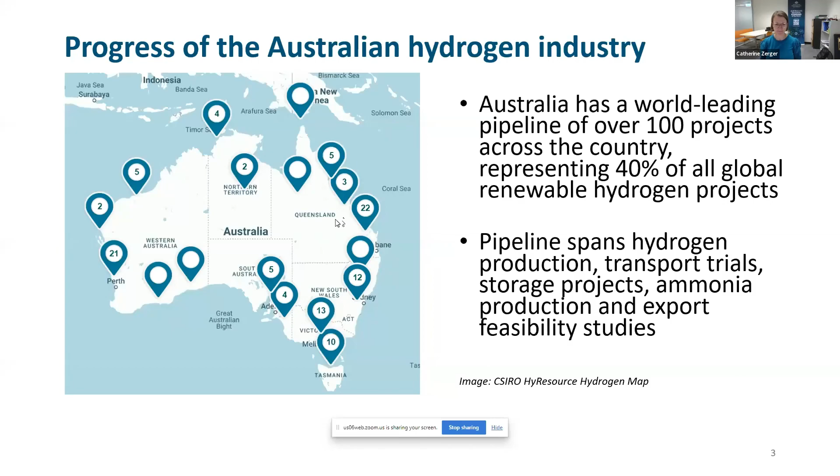To help build this new industry and reach our goal of becoming a global hydrogen leader, Australian governments at the local, state and federal level have been undertaking a range of activities to support early industry growth. Our collective governments have commenced initiatives including working internationally with like-minded countries, reviewing our existing legislation, regulations and standards to determine whether legal frameworks can support hydrogen safety and industry development, and developing a national hydrogen infrastructure assessment to look at hydrogen supply chain needs such as electricity and gas networks, water supply networks, refuelling stations, roads, rail and ports, and improving workforce skills and training.

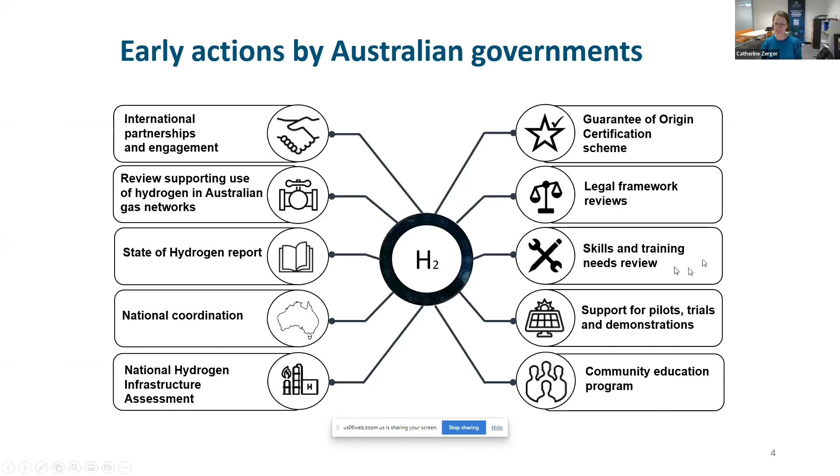The Australian government has now committed over $500 million to hydrogen hubs across Australia. This includes funding for projects in places including Gladstone, the Hunter Valley, the Pilbara, Port Bonython and Bell Bay. I'd also like to add that applications for a hydrogen hub in Townsville have now opened as well.

Hydrogen hubs are regions where various producers, users and potential exporters of hydrogen across the industrial, transport, export and energy markets are co-located. They'll give our hydrogen industry an early stage springboard to scale, which will help support other industrial sectors in the regions.

We're also developing a guarantee of origin scheme that will help unlock economic opportunities for the Australian hydrogen industry to meet growing demands, both domestic and international, for verified renewable energy and clean energy products. The Guarantee of Origin scheme will utilise internationally aligned methodologies to measure, track and verify a range of attributes, including greenhouse gas emissions for hydrogen and other renewable energy products across the supply chain.

The government consulted on a proposed scheme design in December last year, that I'm sure some of you may have contributed to. So for those, we thank you for your contribution to that consultation process.

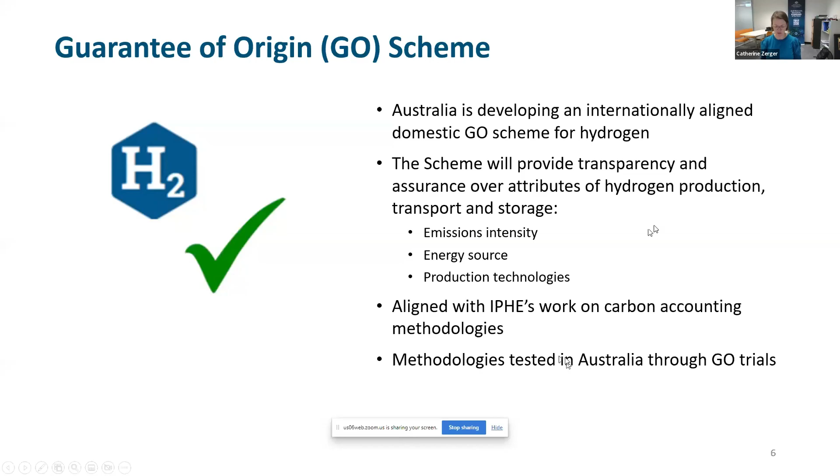The government's also investing $89.5 million to help the transport sector make the switch to hydrogen, including through hydrogen refuelling stations across Australia's busiest freight routes. By 2050, Australia's hydrogen industry could generate $50 billion in additional GDP and create over 16,000 jobs, as well as an additional 13,000 jobs from the construction of the renewable energy infrastructure to power the production of green hydrogen.

International collaboration can play a key role in realising our ambitions. Collaboration can help to accelerate technology development, to overcome technical and economic barriers faster, strengthen the linkages between industry and researchers, and build new supply chains and export markets.

Over the past 18 months, Australia has been developing a series of bilateral international partnerships seeking to advance cooperation on clean energy technology. We have partnerships with 8 countries that feature cooperation on clean hydrogen.

According to the IEA's Global Hydrogen Review, there was a significant increase in official national hydrogen demand targets in 2022, which saw a doubling of global demand for hydrogen over the last 12 months. For instance, the European Commission in 2022 doubled the previous EU renewable hydrogen target to 10 million tonnes of annual domestic production and an additional 10 million tonnes of annual hydrogen imports.

While Australia was only the 3rd country to deliver a national hydrogen strategy back in 2019, today there are 30 national strategies in place, with a further 7 in development. Our states and territories also have their own hydrogen strategy, and we know that many countries have also set hydrogen targets.

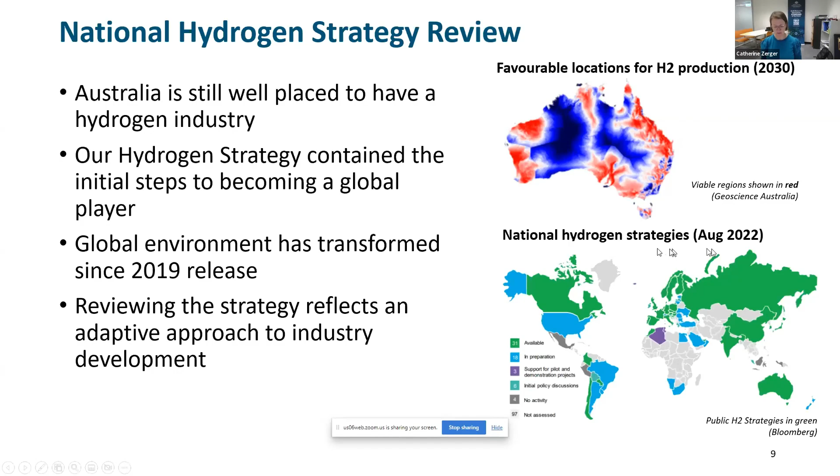So just last month, the Australian government, through energy and climate ministers, announced it would lead a review of Australia's 2019 National Hydrogen Strategy. This review will ensure the national strategy positions Australia on a path to be a global hydrogen leader by 2030 on both an export basis and for the decarbonisation of Australian industries.

The review of the strategy will take account of developments globally and in Australia since the original strategy was developed, including the impact of the Inflation Reduction Act in the United States and policies by other countries to support a hydrogen industry. We will soon be opening this review up for public consultation.

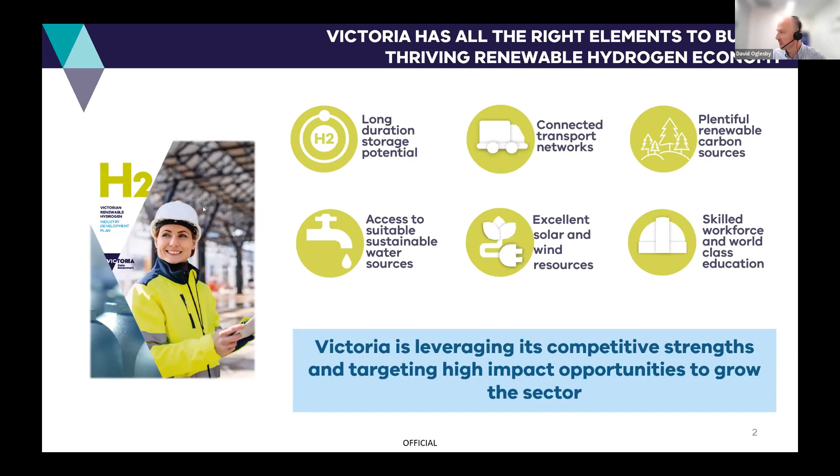Victoria has set strong targets to drive our energy transition. These include offshore wind, renewable energy, energy storage and emissions reduction targets. These targets form the pillars of Victorian energy policy, and although not explicitly focused on hydrogen, are actually helping establish our renewable hydrogen future. Renewable hydrogen has a critical role to help Victoria reach these targets.

To reach net zero emission targets by 2045, we must decarbonise all sectors, including the hard to abate ones. Areas like heavy transport require fast refuelling and longer travel distances than battery-operated vehicles can currently provide. We must decarbonise the freight and truck networks as part of the ambitions around meeting net zero emissions. Hydrogen will be essential to this.

Long duration storage will be required to meet our energy storage targets, and hydrogen can play an essential role in storing and generating electricity. Victoria has a large potential for underground hydrogen storage in depleted gas fields, which I'm going to go into a little bit more detail shortly.

Hydrogen can also offset investment in network augmentation and improve the commercial prospects of renewable projects, which will be critical as we progress towards 95% renewable energy. And finally, offshore wind has potential to bring massive amounts of electricity into the state, enabling large-scale renewable hydrogen production and potentially unlocking opportunities in areas such as green methanol as well as storage.

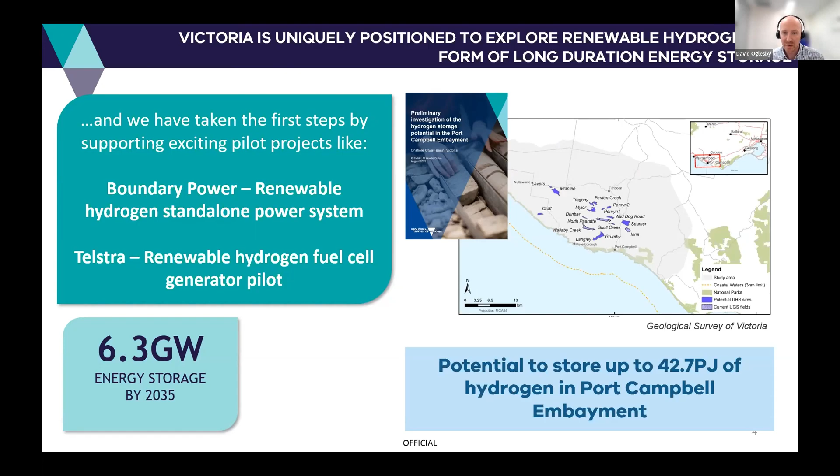The second area I want to touch on is around transport. Transport accounts for 25% of Victoria's greenhouse gas emissions. Renewable hydrogen can help decarbonise a large amount of this. Victoria is already leading in renewable hydrogen transport with at least 7 hydrogen refuelling stations built or in the pipeline.

We are partnering with industry and New South Wales to deliver an Australian-first hydrogen refuelling network on Australia's busiest freight corridor between Melbourne and Sydney, the Hume Hydrogen Highway. Victoria and New South Wales are both investing in supporting to build this project, which will deliver at least 4 refuelling stations between the cities and 25 hydrogen-powered heavy vehicles.

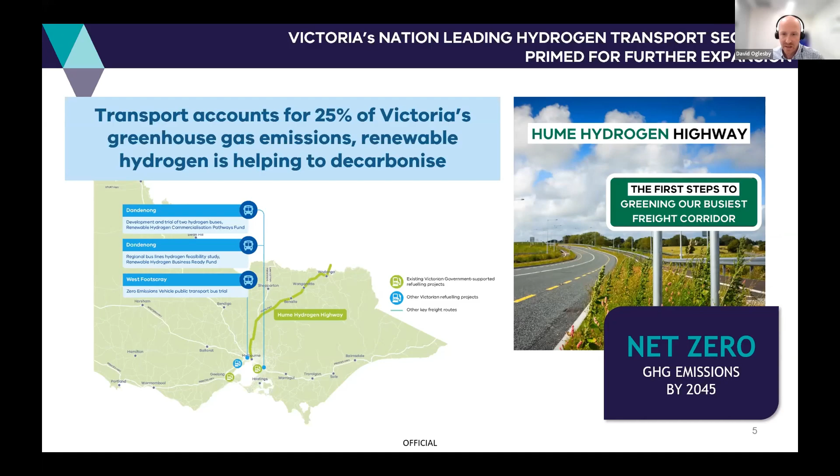The Victorian and New South Wales governments have also signed a MOU with Queensland. This MOU will form the basis of a collaboration on future developments of an interconnected East Coast renewable hydrogen refuelling network, focusing on key freight routes linking the states. In addition to the Hume Hydrogen Highway, Victoria is home to hydrogen vehicle manufacturers Toyota, Hyzon and H2X, and we are supporting a hydrogen bus trial in Footscray and hydrogen fuel cell research at HyCell.

The last area around our targets I want to highlight is offshore wind. The announced offshore wind zones for Victoria closely align with areas of strong potential for large-scale renewable hydrogen production, storage and use, making them exciting investment areas for all types of renewable energy. The majority of investment interest in Victoria's offshore wind to date has largely been linked with renewable hydrogen projects. We're seeing proponents coming with both hydrogen and offshore wind as a package.

Renewable hydrogen production can soak up curtailed renewable energy. This can improve the economics of both hydrogen and offshore wind projects. Large-scale renewable hydrogen production in these areas may also support the manufacture of green chemicals like green methanol and ammonia.

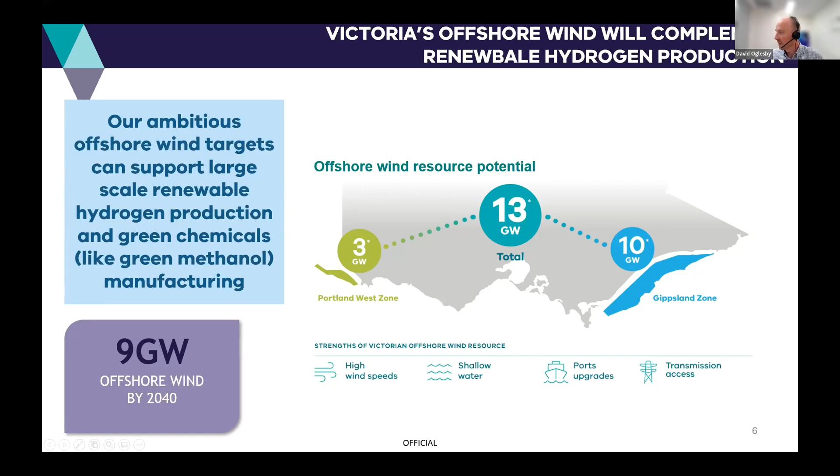Green methanol in particular is an exciting investment opportunity for Victoria, particularly for use as a shipping fuel. Victoria is well placed to capture a portion of that market as we already have the largest container and general cargo port in Australia, and I believe the fourth largest in the Southern Hemisphere. The large shipping volumes and our renewable hydrogen strengths make Victoria a promising location for future bunkering of renewable shipping fuels.

Finally, I just want to cover some of the activities underway in Victoria, which is really building out a renewable hydrogen ecosystem. Victoria has made several groundbreaking investments in renewable hydrogen, including the Renewable Hydrogen Commercialisation Pathway Fund, Renewable Hydrogen Business Ready Fund, and a number of projects under the Energy Innovation Fund. These cover a range of sectors from industrial switching and transport through to electricity generation and gas blending.

These initiatives support the industry to build this emerging sector from the ground up, driving hydrogen production and creating the demand and innovation needed to build scale and impact. These investments and our ambitious targets are creating one of Australia's strongest domestic hydrogen markets, ready for further investment.

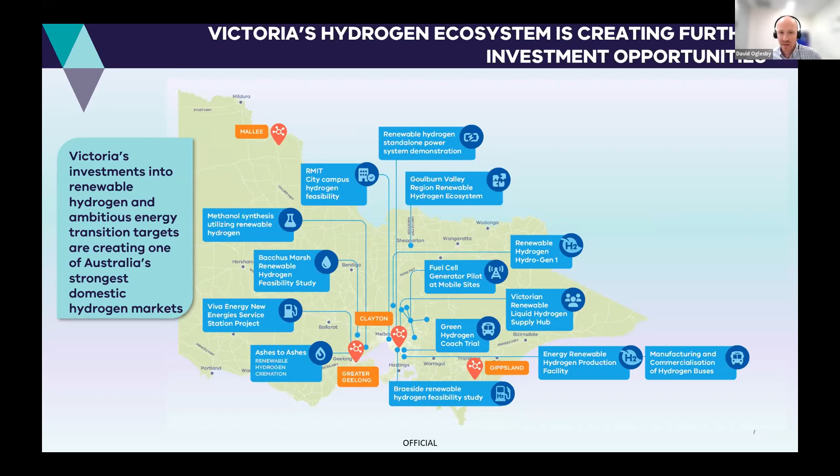Thank you, David, for sharing a very solid presentation. During your speech, we've also received so many questions from our audience. The first question is: what is the most exciting emerging renewable hydrogen opportunity in Victoria currently, and how does the state plan on capitalizing on it?

It's an excellent question. There are a number of different areas, and we've taken a broader approach around how you build out a domestic market, so we've got a number of areas where we're seeing high potential. But a couple are worth highlighting that we're seeing emerge quite quickly, and it gives us a unique difference from other jurisdictions. The energy storage, hydrogen storage aspect is something we're really keen to explore in detail. We see that as a bit of a game changer in terms of the role of hydrogen in Victoria, and more broadly within the NEM.

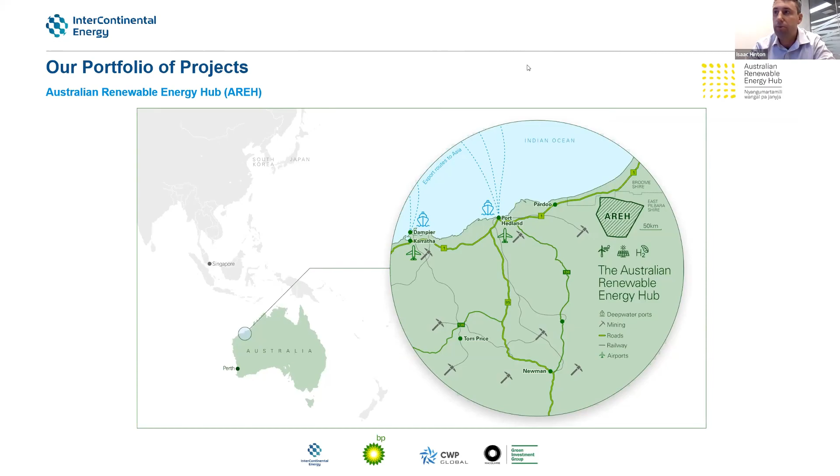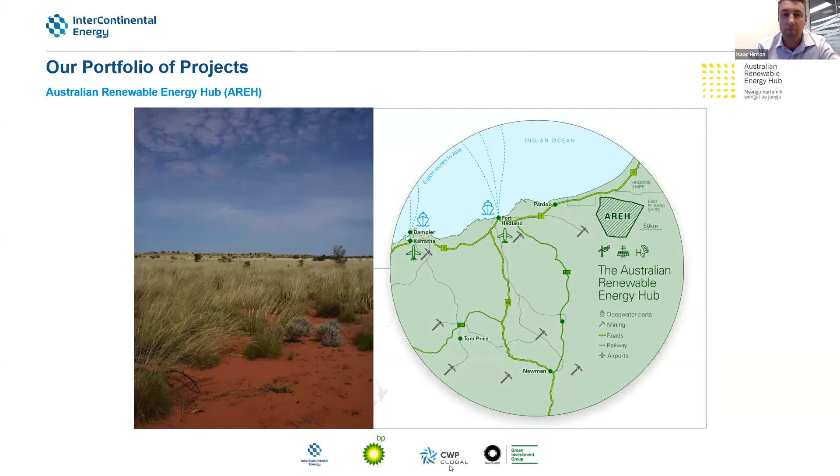At full scale, AREH could produce approximately 1.6 million tonnes of green hydrogen per annum. But also, and importantly, the project could be a major supplier of electricity, hydrogen, and hydrogen products to the Pilbara area, which I'm sure many of you know is a major mining hub of Australia. We think this project has huge potential to support the decarbonisation efforts of the mining industry. With the partnership of the Nyangumarta people, the traditional owners of this land, it's an exciting project for the community, region, and the country.

Next is the Western Green Energy Hub. We believe this is one of the largest proposed green hydrogen projects currently in the world.

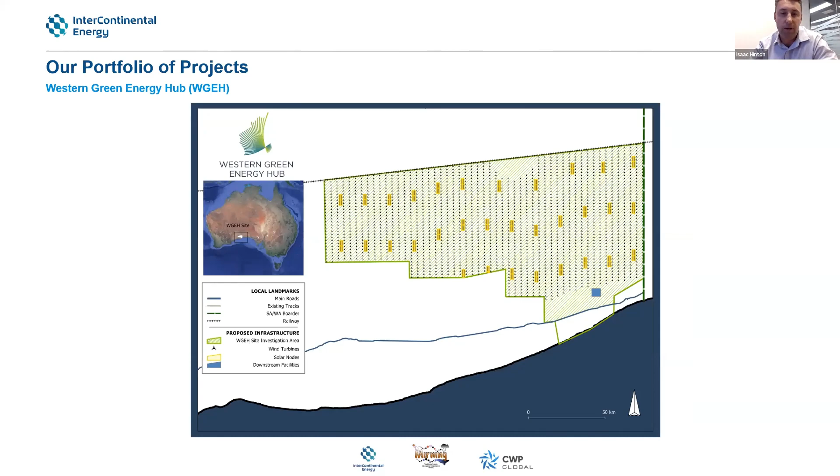The vast coastal desert plains located in the far southeast of Western Australia's Goldfields region, this hub will harness the untapped renewable energy of the wind and the sun. Now, the project is in partnership with the Mirning traditional owners in more ways than one. The Mirning have a 10% ownership in this project, a director on the board, of which I'm chair at the moment, and involved in all the decisions of the project and its development. To our knowledge, First Nations ownership of a major project such as this is the first of its kind in Australia, and we're incredibly excited to be on this journey together with the Mirning. Now, to be built in phases also, the project has a capacity of up to 50 gigawatts of upstream wind and solar. That equates to approximately 3.5 million tonnes per year of green hydrogen that will be produced.

Our next project is the Green Energy Oman, or GEO. This project was initiated in 2018 in partnership with OQ, the Sultanate of Oman's global integrated energy company, and Enertech, a Kuwaiti state-owned company focused on clean energy investment and development. On the 10th of January 2023, we announced that Shell has joined GEO as the operating partner to develop this 25 gigawatt project. The consortium is working towards delivering more than 1.8 million tonnes per annum of green hydrogen to accelerate the energy transition both in Oman and internationally.

So on to success factors. There are a number of success factors we believe as ICE, InterContinental Energy, as an organisation, which we think is critical to producing green hydrogen at scale.

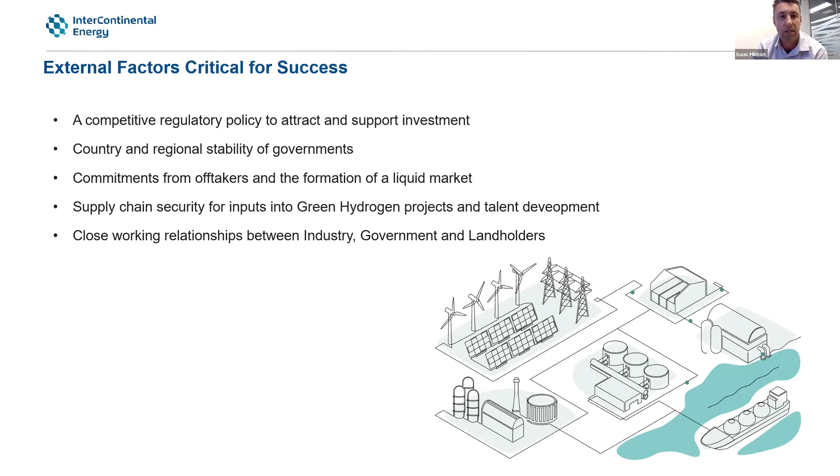So with this quick overview, I'd like to thank you for your attention and hope I've given you a snapshot about InterContinental Energy's critical success factors. If you have any questions we don't have time for today, please don't hesitate to email info@intercontinentalenergy.com, and I'll make sure we have the right person to follow up with you.

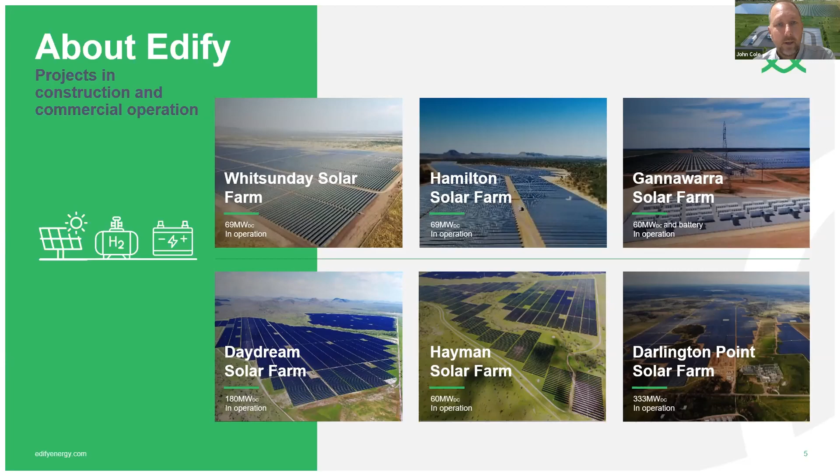As I say, they're solar and battery storage, and that's just shy of $2 billion that we've raised and put to work, which is just the beginning for this business. A recent project we've got underway, in the final stages of construction and commissioning, is a very large battery with Tesla in southwest New South Wales. The offtake agreements there are with Shell Energy and Energy Australia. This had government backing from the New South Wales government and also ARENA to support the smart power electronic application and the way we're using the inverters, harnessing the inverter capacity to keep the network stable in that region.

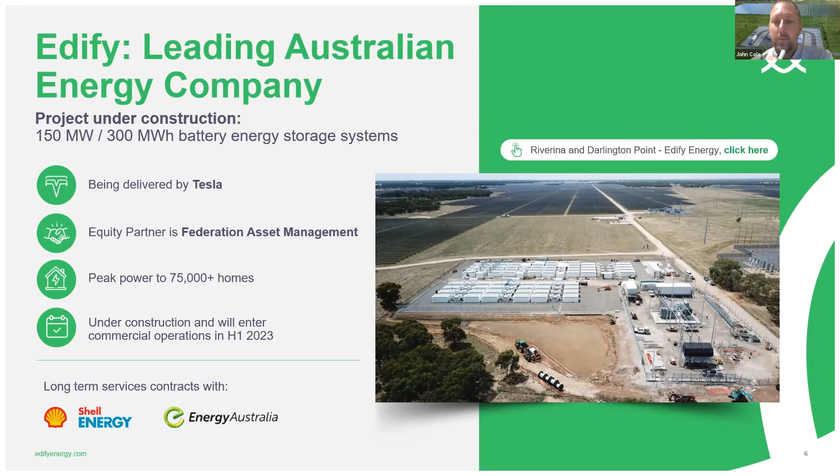This slide shows what Edify Energy has done. We started in solar. I thought it was going to be easy like it was in Europe, and the assets were relatively passive, but in this country they're very much hands-on assets and need to be managed. So you understand more about the market, you're in deeper relationships with regulators and governments, because we develop and also own and manage. Community relationships are very important to us, and being a very good long-term neighbour in our communities is fundamental.

And as we've gone through that energy development, we looked at the development of those projects. We looked at every site we had to determine which were the sites best for green hydrogen production and export. And the lead of that, at least currently, is the project I'll talk about now.

So we have a project. It's in one of the two renewable hub areas, hydrogen hubs determined by the Queensland government recently. One is in Townsville, the other is in Gladstone. I'll show you the site specific - it's 105 hectares of land, an artist's impression of a hydrogen facility and behind-the-meter solar behind me.

We've taken a real developer's approach to this project. So we secured the land, we obtained the development permission for a gigawatt stage project that was technology agnostic and could be built out in many stages to meet the needs of the market as it evolved.

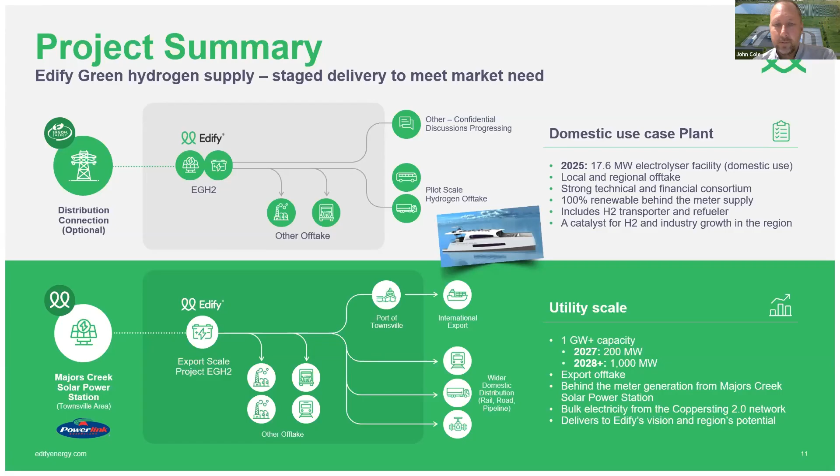There's just a little bit here about what we've been doing with Siemens Energy, our technology provider, and some of the detailed work as we've nailed down the engineering, looking to value engineer a number of aspects, or value out the aspects that are more draining from a CapEx perspective, and improve the documentation as we move towards financial close.

We were also successful recently - the largest project, the only project in Queensland, the largest grant recipient under the joint Australian and German government hydrogen technology incubation funding round called HyGATE. Our partner there was Siemens Energy, as the technology partner and also investor into the project.

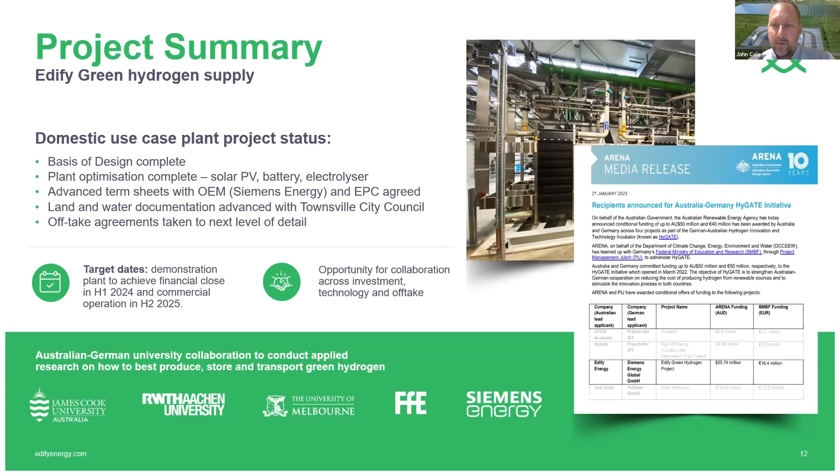And we have a research angle to that as well, looking between two Australian universities, James Cook University and Melbourne University, and like counterparts in Germany, Aachen and FFE, looking at the best ways to produce, store and transport green hydrogen. And that research has a very, very practical application.

So the HyGATE success was really just a validation of where our project is by way of readiness and the features that we thought made it a very attractive project, both from a demonstration plant and also for its export potential. We're also backed in by ARENA and the German equivalent, the PTJ, which was very, very encouraging for us.

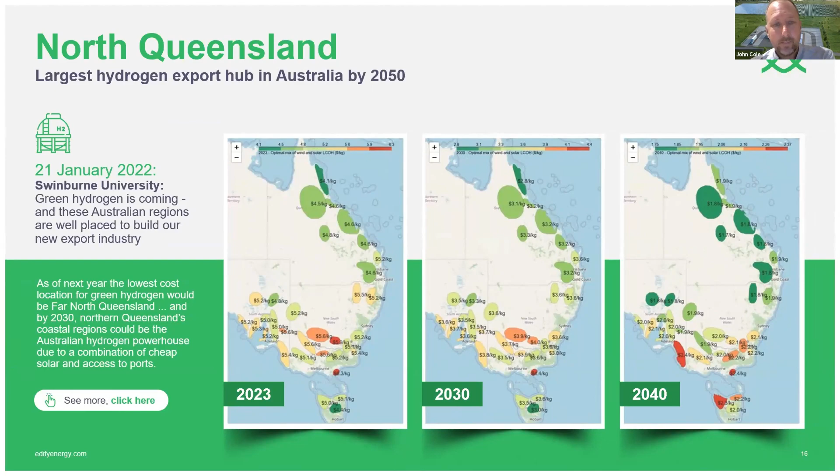That view, I think around early 2022, was echoed when Swinburne University came out with an LCOH study that arrives at a very similar outcome. There are links in the slides that you can click through and read at your leisure.

Around two years ago, the former CEO of one of the Queensland-owned utilities, CleanCo, Maia Schweizer, at a conference I was presenting at with her, showed a slide that really surprised me - she says it's her view, not government policy - of a 20 gigawatt green export hub in Townsville. The Queensland government has recently commissioned a report from Advisian, which basically goes on to validate the attractive features of our project, though they didn't have the resources to produce reports of the calibre I've just referenced.

Townsville has a very large capital base, population base, the largest city in North Queensland. There's a hydrogen hub funding round currently from the federal government, $70 million. Renewable resources and water I've already talked about. The community is definitely backing this in and sees the opportunity, so there's good federal, state, local government support as well as community support.

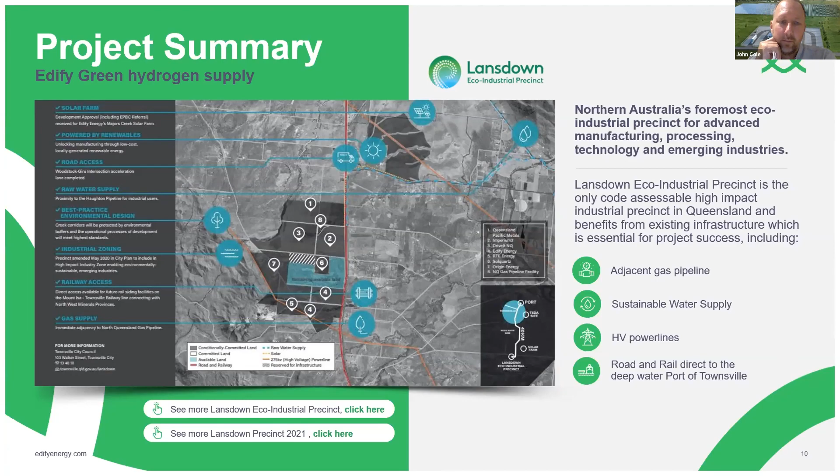At our site, the Lansdowne Eco-Industrial Precinct is the only code-assessable high impact zone in Queensland. The Queensland government has also taken over development responsibility, appointing a Coordinator General to make sure all the infrastructure needed is coordinated in a strategic, state-based manner, so that all the bulk renewables come in to connect into these orange power lines just south of the site, with the site being a significant priority development in North Queensland.

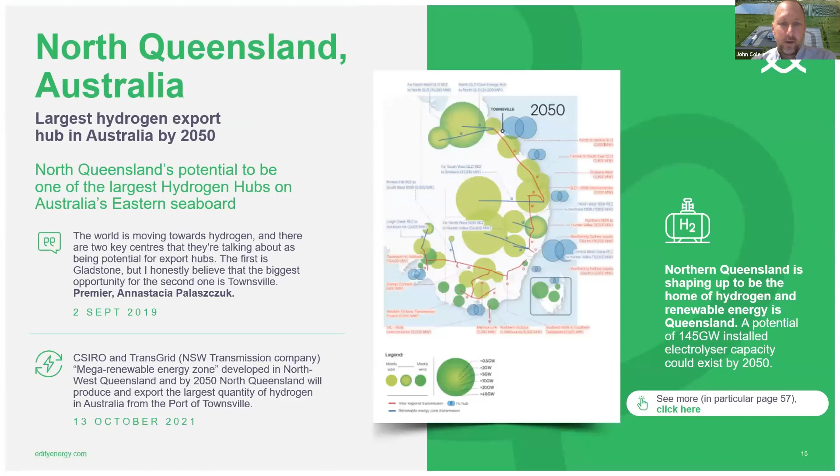So those things bode very well for both us and for creating the ecosystem and hub you need across the different jurisdictions. I think North Queensland has a lot going for it. There's been a local North Queensland hydrogen consortium established, and anybody interested in hydrogen in the region should definitely reach out to the consortium there - we were one of the founding members along with others.

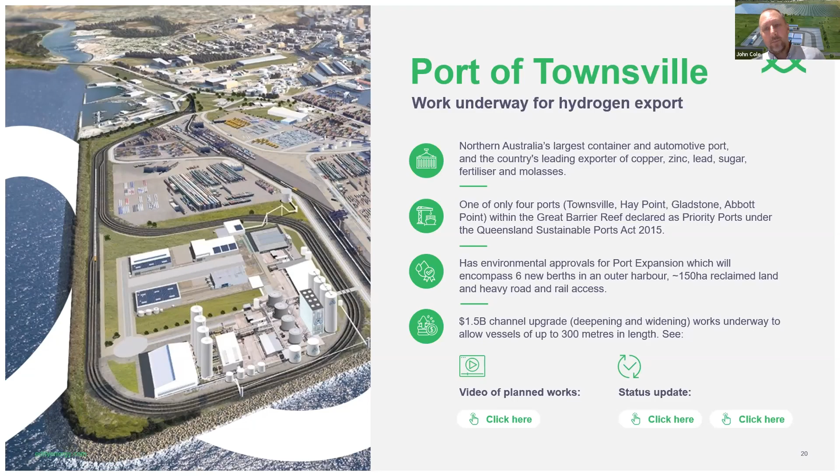And the real jewel in the crown, as I call it, is the Port of Townsville. This slide's cut off some of the imagery, but this is an artist's impression. This channel - it's the only port on the Great Barrier Reef with environmental authorisations to expand - as it deepens and widens its channels to take larger vessels, that spoil is being used to reclaim land on which will sit the infrastructure necessary for green hydrogen and associated product export. Of the half a dozen new berths, three have been earmarked for green hydrogen related products. So that's excellent.

And then on the technology side, we've gone blue chip. We really like Siemens Energy - their depth and the number of places their electrolyzers are deployed around the planet is very impressive and bankable. That's what we need from our perspective.

And then we've got a partnership with Enscope, who have been working with Siemens for quite a while, to deliver the project basically on a turnkey basis. It's a joint venture, but a turnkey solution from the project perspective, which is what investors are looking for, and has risk - particularly in early stage or formative projects like this - allocated to the right parties to take them.

And the last slide is just a bit of a summary, to be read later, of the things I've just talked through. So I think we've got a very, very exciting project in a very good region of Australia, with endless opportunity, and we look forward to playing our part in delivering and executing it. So thank you very much.

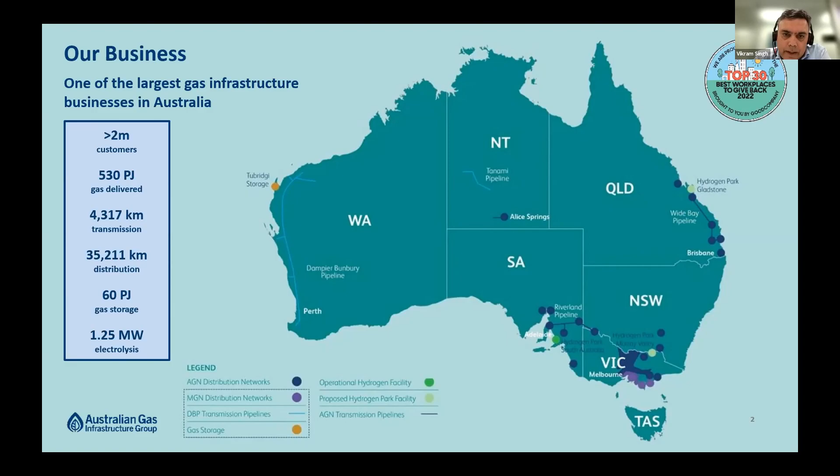Just for a very brief background, AGIG is essentially a gas infrastructure company. On the East Coast, we have several gas distribution businesses, and in total about 2.2 million customers are connected to our gas distribution businesses. We operate in Victoria, South Australia, regional New South Wales, Brisbane and regional Queensland, and in Western Australia we have a very significant gas transmission business.

As we look towards 2030 and beyond, we know the world is on a trajectory to decarbonize energy use, and with that in mind AGIG has embarked on its own decarbonization journey. What we're targeting is to inject renewable gases into our network up to 10, maybe 20% by 2030, and lay the foundations for full decarbonization of gas supply in the distribution network between 2040 and 2050. So that's our aim, and we have several projects.

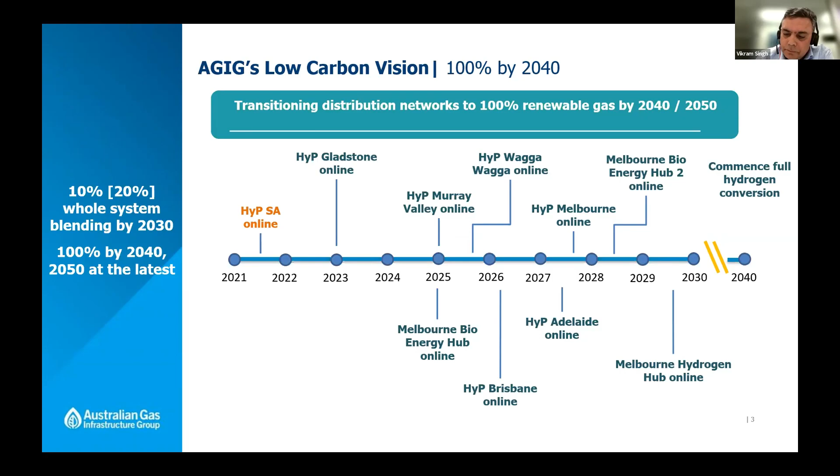Some we have developed, some are in very advanced feasibility stage, both renewable hydrogen and biomethane. So that's what we refer to when we say renewable gases. Just another view of where our projects are being developed and implemented, pretty much everywhere where our assets are, from Queensland, Victoria, regional New South Wales, and South Australia.

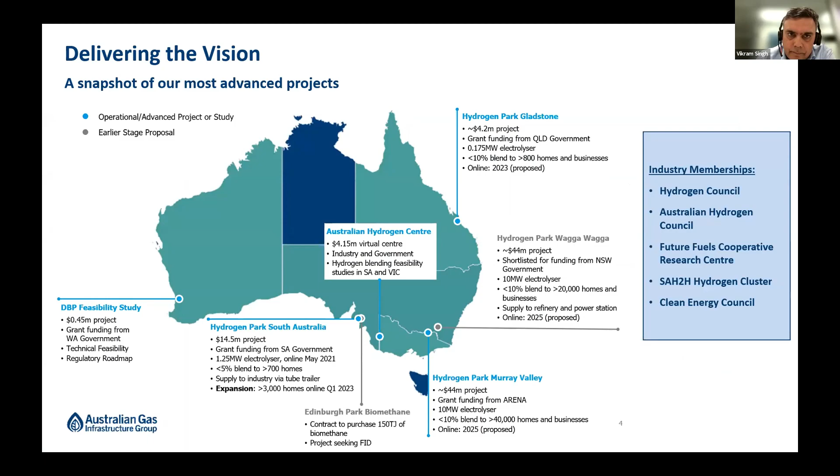We also have a very good partnership with BOC, and we supply them with renewable hydrogen, which they then supply to their industrial customers. So the facility is in operation, it's not an artist's impression, it's been working quite well for two years, and now we are expanding our footprint.

We're going to 3,000 homes this month, and after that we go to 10% blending into 4,000 homes, and further supply renewable hydrogen to BOC for mobility and other uses. So it's been a really important project, and we've learned a lot of lessons delivering a small project, but still the largest electrolyzer, and that has really given us the confidence to develop much larger projects.

To achieve 10% renewable hydrogen, we're looking at a gigawatt of electrolysis to achieve our target, and we are well and truly on track to deliver that project, to deliver on that ambition.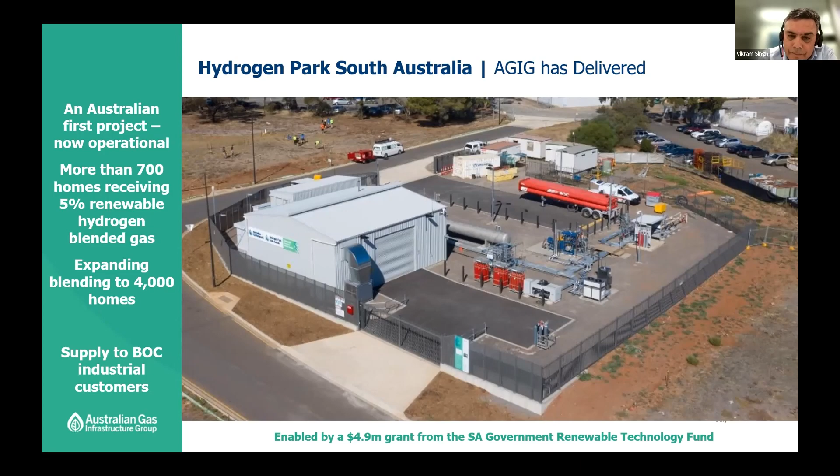I'll talk to you about our second project, Hydrogen Park Murray Valley, a 10 megawatt project which we are developing in Wodonga. It's co-located with the Wodonga wastewater treatment plant, so there are lots of synergies with the wastewater, oxygen, and biomethane as well. It's going to do 10% blending for 40,000 customers in the regional towns of Wodonga and Albury, so it's a very significant project for us. It demonstrates gas blending, or hydrogen blending, at scale.

I'm glad to say that hopefully this month or early next month we can announce our FID, and then we expect the project to reach commercial operations in Q1 2025. Once this is in operation, this will be the largest electrolyzer. Right now it's 1.25 megawatts; hopefully in 2025 it's 10 megawatts.

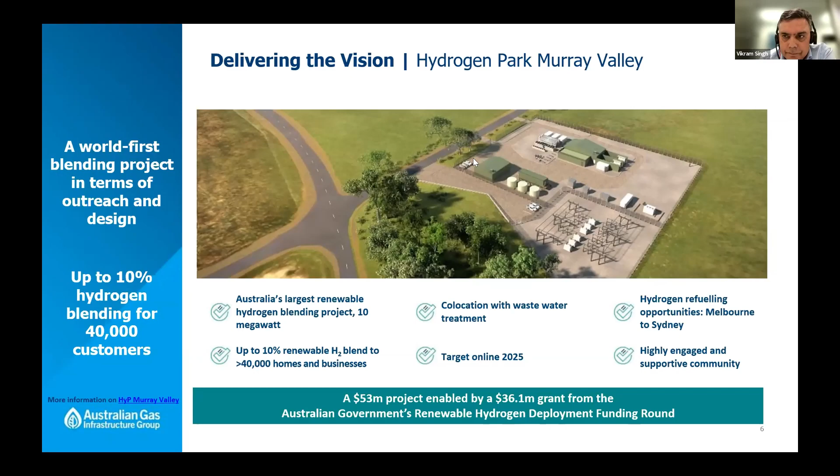This is the project site, so it's a really good site. And we're really excited to have Northeast Water very engaged and very supportive of our project.

One of the things about the successful deployment of these projects is really getting the support of the community and our key stakeholders. That's been a really important lesson when we were delivering HyP SA. We did extensive stakeholder and community engagement, and the community were really supportive, and that's the reason we were able to deliver our project in Adelaide. As we extend that project from 700 homes to 4,000 plus homes, the community is really excited to get renewable gas delivered to them.

We took a similar approach in Wodonga Albury, where we did extensive community and stakeholder engagement, not only with the broader residents of Albury Wodonga, but also with key stakeholders including technical regulators, the council, governments, the landowners, community groups, Vic Roads, Northeast Water, Ausnet as the local distribution company, and all the industrial customers in Albury Wodonga, making sure their industrial processes were not impacted by what we were doing. We also had several focus groups with community and business groups, so a fairly significant community and stakeholder engagement program.

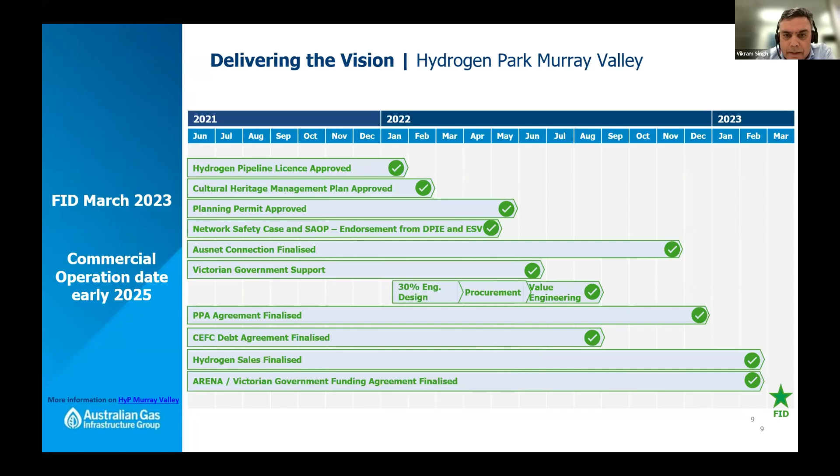But that's not where we are stopping. We're developing a similar project in Wagga Wagga, regional New South Wales, and that's under discussion and development with various governments and funding agencies.

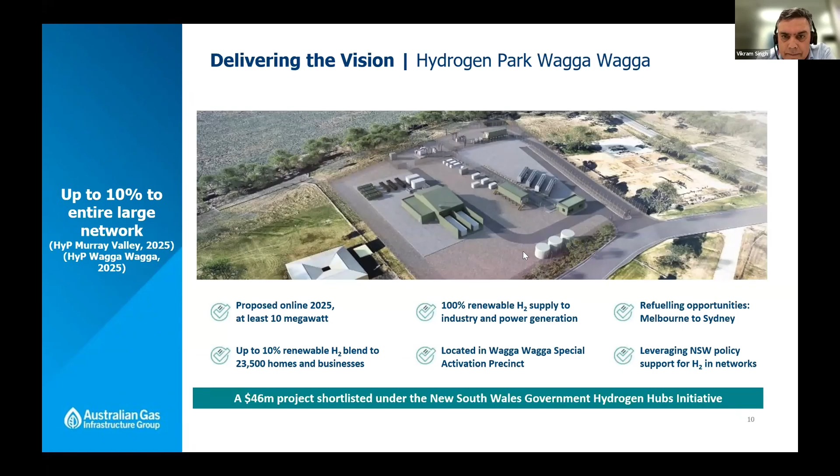Also, when we are developing our projects, we have a view to becoming a large supplier of renewable hydrogen, not only to the domestic market in terms of gas networks, but also to mobility as well. So we are positioning ourselves to be a supplier to these emerging markets. And of course, if you look at where Wodonga is located, it's right along the Hume Highway, very well placed to supply renewable hydrogen to the Hume Highway corridor once that gets underway.

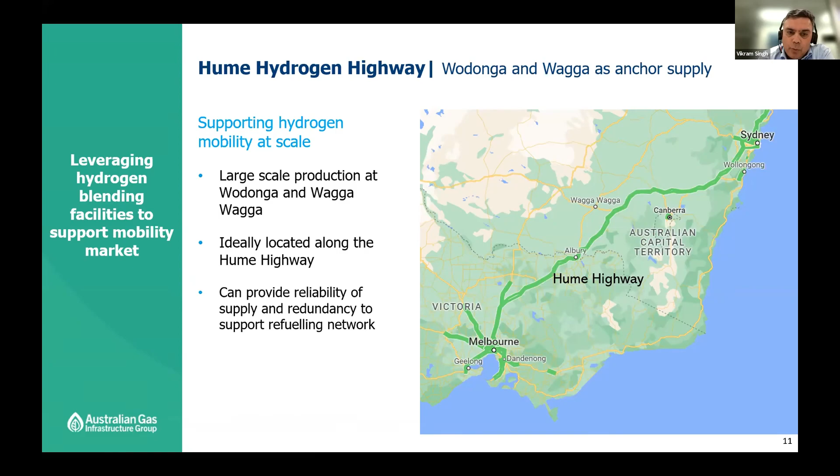So in summary, I think our success factor has been really, we have a market and the market is gas blending. And what that does is enable us to get the investment going, build scale and capability. We've demonstrated that can be done successfully with our Hydrogen Park Adelaide project, and also Wodonga and Wagga and other projects. We hope to have about 1 gigawatt of electrolysis supplying the domestic market by 2030. That gives us scale and capability, leveraging off a market that already exists and which we understand.

And the other thing is that once we have that anchor investment bedded down, that gives us the opportunity to supply the mobility sector, which has been slow to emerge in Australia, but finally it's getting some momentum. And of course, the existing industrial demand. So we are setting ourselves up to be a large supplier for the domestic market, including mobility as it ramps up. And through this, it's an efficient way to decarbonize our gas networks, providing customers choice, and also supplying renewable hydrogen to the mobility sector.

So in summary, the key factors for success as far as AGIG is concerned is the access to the market being gas blending. It doesn't require negotiations with export customers. It doesn't have the challenges of a gigawatt type scale project. We can start small, build and grow in increments which make sense to us - 1 megawatt, 10 megawatt, 40 megawatts, 100 megawatts. And we can do that on the back of blending into our gas distribution networks and set ourselves up for supplying hydrogen mobility and other industrial demand.

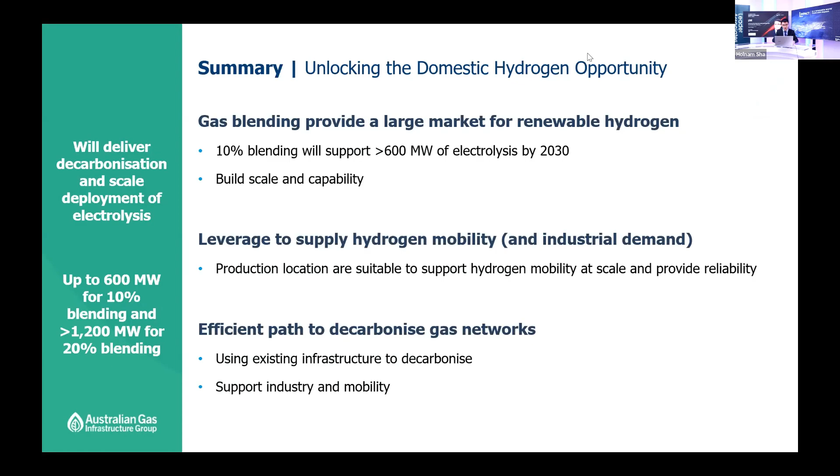He wants to know what are the challenges you are facing with the embrittlement of pipeline and how you are planning to mitigate this now and in the future.

Yes, very good question. It's a question we often get asked. An interesting fact is that our distribution networks are all plastic networks. There are some cast iron mains, but we're in the process of replacing them, not because of hydrogen, but just because of safety and leakage concerns. So the hydrogen network, the distribution network, is all plastic, and in fact it can take about 100% hydrogen.

When it comes to the high pressure network, which operates at around 30 bar, even those pipes can take about 10-20% hydrogen. So that's not a problem at all. The larger transmission systems, the larger transmission pipes which run at very high pressure, 80 bar and above, there is still research which needs to happen to see how they will play a role in hydrogen blending and how that evolves over time. But when it comes to the medium pressure and low pressure networks, they're all fine with hydrogen blending, and in fact 100% hydrogen. Our network is 100% hydrogen ready.

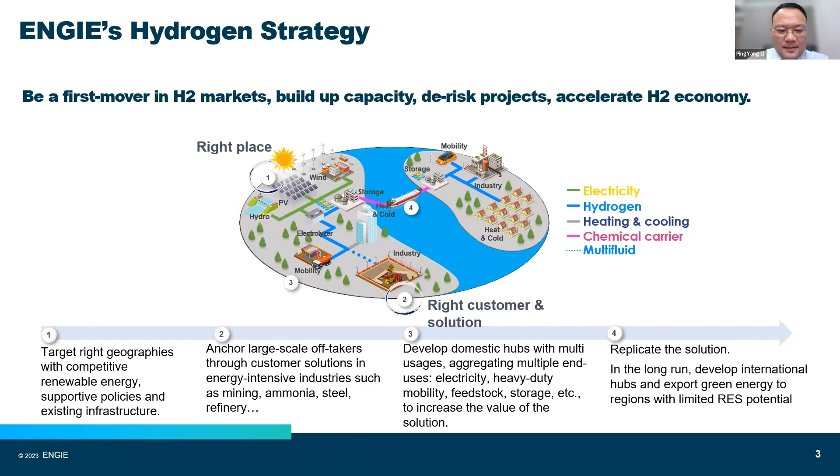ENGIE has a big ambition in hydrogen development. The approach ENGIE takes is to position as a developer, owner, and operator of the entire hydrogen value chain. We often do it with partnerships. Here we illustrate some of the prioritized targets by 2030. For example, we would like to achieve 4 gigawatts of electrolysis for hydrogen production, and we are interested to build 700 kilometers of infrastructure for hydrogen pipelines and more than 100 refuelling stations.

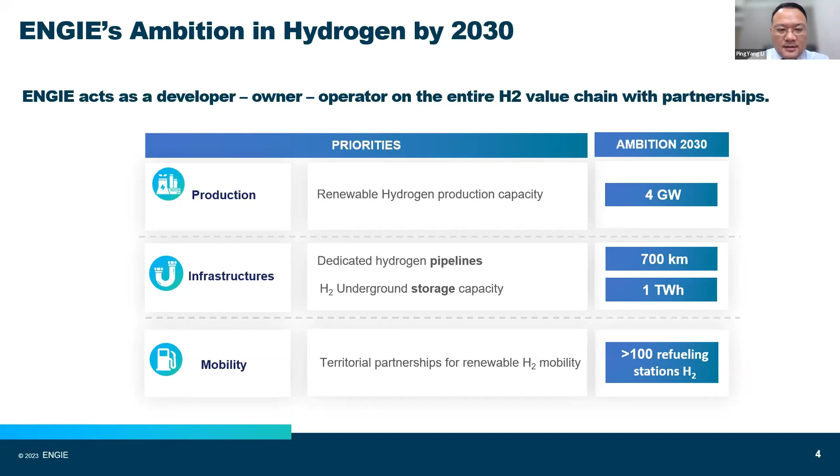ENGIE sees hydrogen as a global business, and we operate worldwide. We have more than 30 projects in the advanced development stage. Here is a selection of a dozen of them to illustrate which type of projects we are working on. You can see it's quite diversified in customers, partners, and industries we are targeting. The projects include mobility, heavy-duty mobility such as trains, maritime, mining like mining trucks, hydrogen for biorefinery, green ammonia, chemical feedstock to produce methanol and other renewable fuels, and also liquid hydrogen.

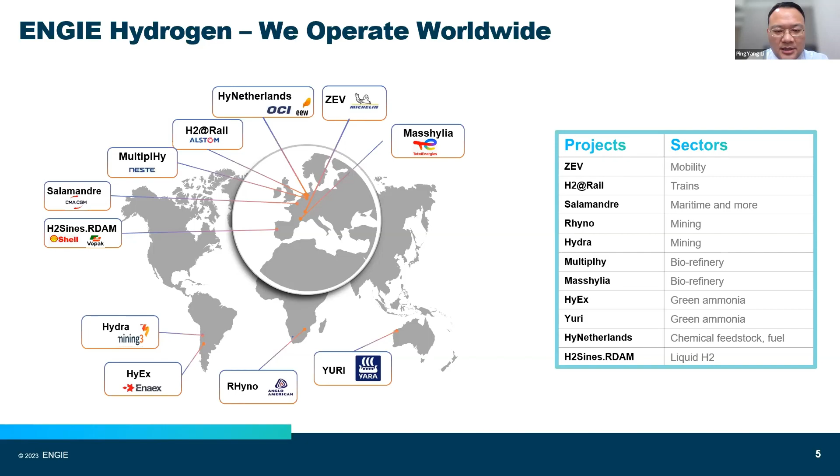Today, the main discussion here is the YURI project in Western Australia in the Pilbara region. ENGIE and Yara have set up this collaboration surrounding Yara's ammonia plant in the Pilbara area. If you look at this solar resources map, Pilbara is one of the best solar irradiation regions all over the world. And there is a port, the Dampier port, one of the few ammonia ports that can export ammonia to serve Australia and also Asia and beyond. Today, Yara operates 0.8 million tons of ammonia plant already, and they export the ammonia over Asia.

The YURI project is a multiple stage roadmap, and the roadmap is to establish a new industry, including decarbonized ammonia production, at the same time harvest the rich renewable resources in Western Australia to make hydrogen and ammonia, and use those chemicals as a feedstock and also as a fuel, to serve the domestic market and export to Asia and beyond.

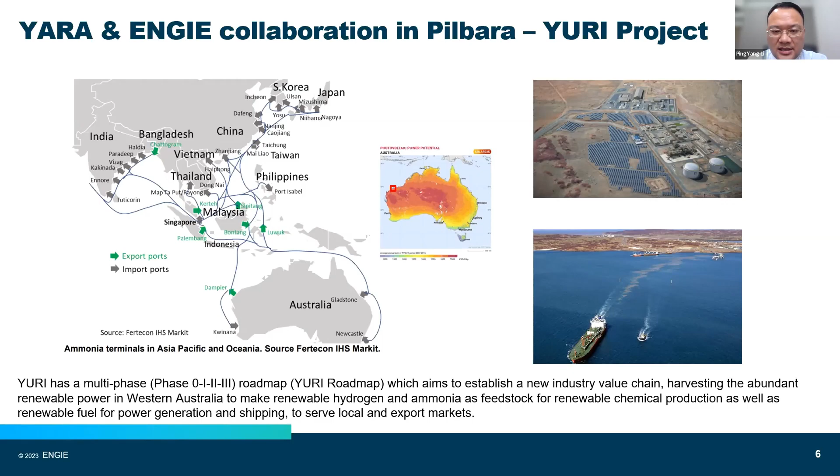The roadmap has phase 0, 1, 2, 3. The first 2 steps are to decarbonize a part of the existing ammonia plant, and the future phases include building a new ammonia plant at the same time to scale up the green products output. YURI's primary hydrogen use target is to produce green ammonia.

You can also scale it up to include other hydrogen and renewable energy use cases, such as supplying to the mining industry to produce green steel and to serve the heavy-duty transportation in that area.

Some of the products can also be exported through the Dampier port, either in the ammonia form or in liquid form of hydrogen or other chemical compound.

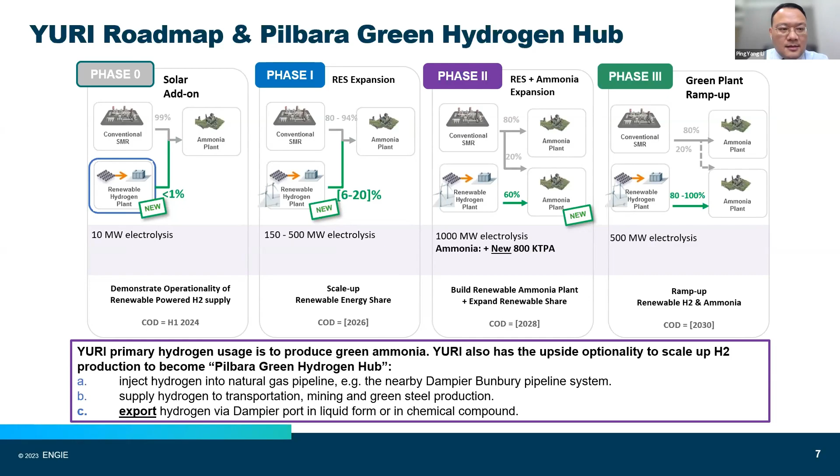The project currently in construction is the YURI Phase 0, the first phase of the YURI roadmap. Here I would like to share some key facts. On this chart, you can see the construction area is surrounding the Yara ammonia plant. It includes a 10 megawatt electrolysis unit, 18 megawatt of solar PV, and 8 megawatt hour of battery energy storage system, and the other balance of the plant.

The project total cost is around 90 million Aussie dollars, with around 50 million from government grant funding, and the rest from equity of ENGIE and Mitsui.

The project concept was studied in 2019, starting with the feasibility study. We took 1 year and obtained the ARENA grant funding of 1 million to support the feasibility study. 6 months later, we started the EPC request for proposal, and it took another 5 months to receive the EPC proposals. In February 2021, we received 2 million from the WA government to support the construction.

In May 2021, we received ARENA grant funding of 42.5 million to support the construction. In September 2022, we declared the FID, and in November we started construction. The COD is expected in the first half of 2024.

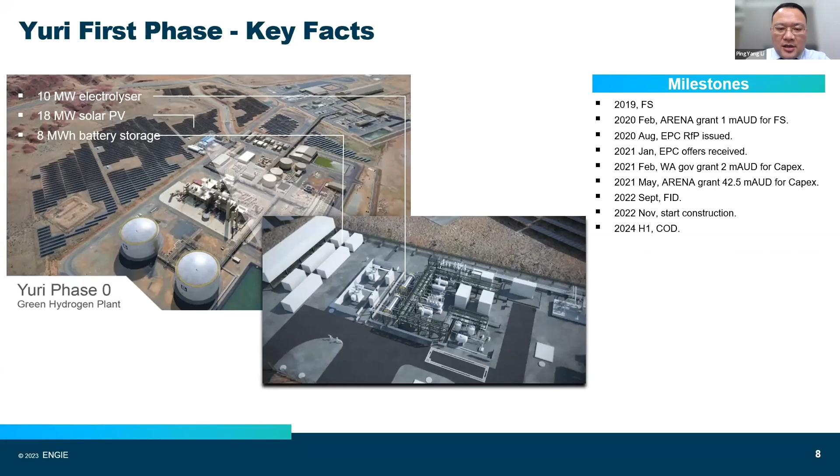Being the first of kind project in a relatively remote area with strong cultural heritage, the rock art in the Pilbara area, we have obtained good support. Collaborative stakeholders really made the project happen.

I can share some of the high-level takeaways. The project's success factors can be looked at from multiple angles. A strong government support for such a semi-commercial, semi-demonstration project is fundamental.

We consider that today hydrogen is still pre-commercial. Government support is fundamental to make the projects cross the line and start construction. The second part is the project set a good example for the utility world, or let's call it a captive infrastructure project, meeting the usual feedstock industry, where usually the ammonia players take natural gas or other supply as their feedstock. Here we are building infrastructure to produce the feedstock for the customer.

The project is a success. We really appreciate the full contract with long-term off-taker agreement between the project company and Yara. At the same time, the project benefited from synergies with the existing operations of Yara, who operate the ammonia plant, with the hydrogen plant located nearby.

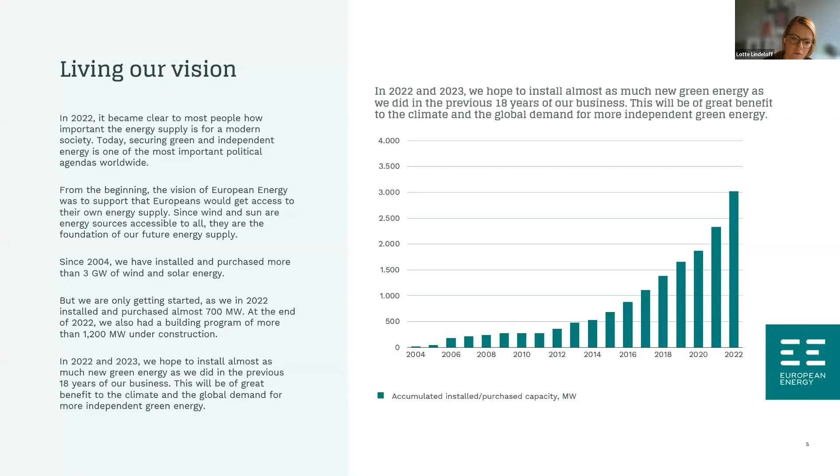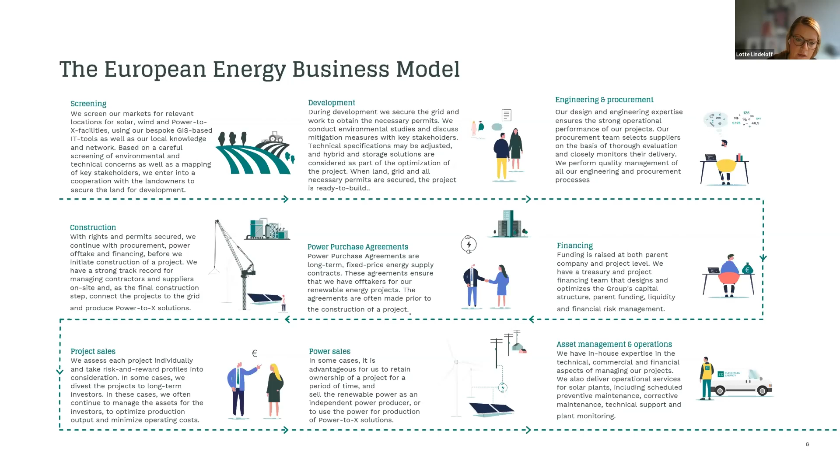We have a pipeline of 35 gigawatts when we look at our power generation assets, and that's in terms of assets already in operation as well as assets under development. This pipeline is also what enables us to enter into the power to X space, because this forms the basis for our production of excess energy. The way we approach our projects, we have an A to Z approach where we take care of all aspects from the first screening, the first identification of a project opportunity, all the way into construction and operation of the assets. I can dive more into details if there are more questions, but I'd like to get to our specific project. Just to say, on this slide, right now European Energy is present in 21 countries, also in Australia, where we have an office.

If I then dive into two of our Power-to-X projects, I would like to zoom in on an e-methanol project and also a hydrogen project. Both of them are currently being built in Denmark. We have taken final investment decision on both of them and are in the construction phase of both of these projects.

The first one, the e-methanol project that we are establishing, is the world's largest of its kind. It's going to be established in the southern part of Denmark, in a small city called Kassø. Here we will establish an e-methanol plant that is of commercial scale. We will not receive any subsidies to produce this e-methanol. The plant, when it has been established, will be able to produce 32,000 tons of e-methanol per year.

We can actually scale up to produce 44,000 tons per year. But as a starting point, to get our operation profile of this plant to match also the operation profile of the power generation assets, we aim at producing 70% of the time, and that would lead to a production of 32,000 tons of e-methanol per year.

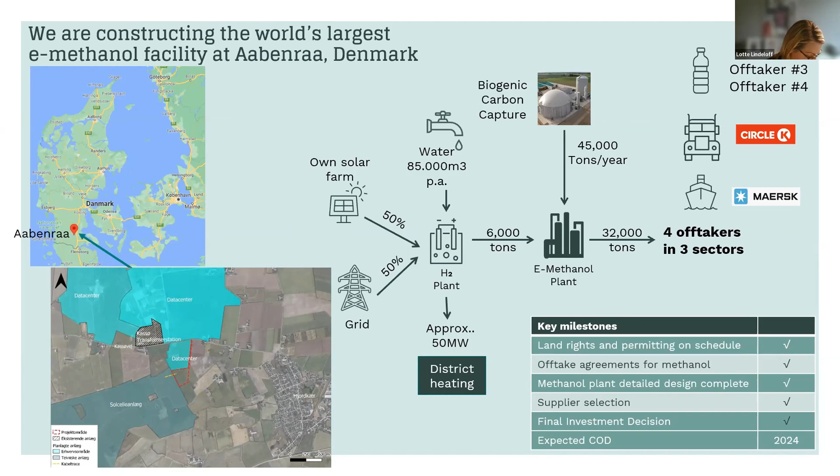This is how the plant will look like. The colors are not accurate, but I was told that the colors are quite important when engineers work with these drawings. But this is how it will look like.

This plant will be established in 2 lines. That's why you can see there are 2 towers, each with a capacity of 16,000 tons of e-methanol.

We are already designing our next plant, which will be triple the size of this one, and we expect to enter into operations with a larger plant in 2026, 2027.

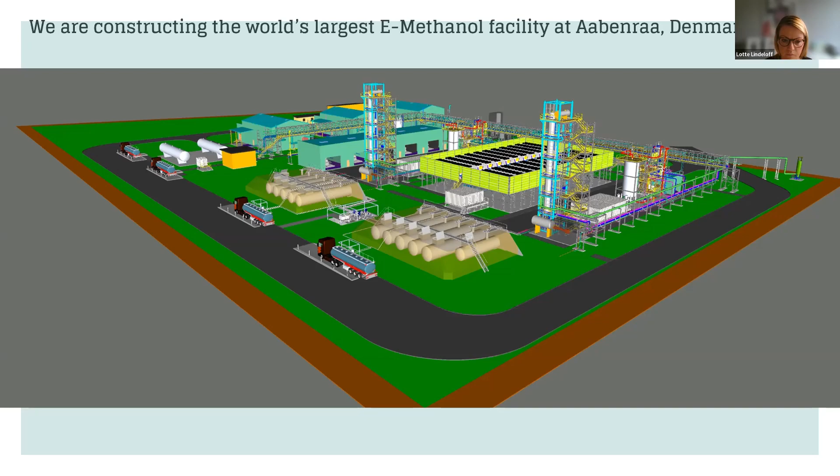Another one of our projects is a hydrogen plant, which we are also establishing in the southern part of Denmark. This is a plant where we will produce hydrogen. In terms of capacity, it's way smaller than the e-methanol plant. This plant is going to be established in 2 phases.

We expect this year to be able to enter into commercial operation with a capacity of 3 megawatt electrolyzer. Then already in the beginning of 2024, the plant will be expanded, allowing for a capacity of 9 megawatt electrolyzer. That said, the balance of plant has already been designed for a capacity of 12 megawatt.

For this plant, we quite on purpose decided to build it in several phases, because this allows us to test different suppliers of electrolyzers. So we actually expect to make use of up to 3 different suppliers for electrolyzers, and then we can test how the different electrolyzers from different suppliers perform, how they can be installed, and how easy it will be.

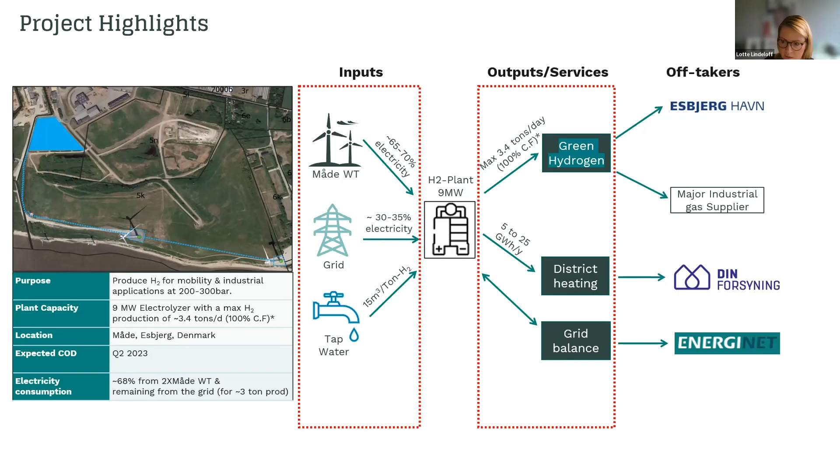Also for this plant, I'm going to skip to the next slide where you can see the layout. On the left side of this layout, you can see 4 trucks. This is actually how we approach the question about storage and also transportation in terms of delivery flow.

For this plant, we have established what you could call a movable storage, which means that we would always have at least 3 containers available, of which 2 will always be at site, and the rest, 1 or 2 containers, will then take care of the transportation to our customers.

The hydrogen produced at this plant will be off-taken by the nearby Esbjerg Harbor and also Air Liquide. Esbjerg Harbor will utilize the hydrogen as a battery, because via fuel cells they will convert the hydrogen into power for the ships in the harbor. Air Liquide is one of the world's largest gas suppliers, so they will supply hydrogen as gas for their customers.

I think that was a high level look into our 2 first PowerFlex projects. We already have quite a huge pipeline of coming PowerFlex projects. We have around 6 more projects in the development stage in Denmark. All of these will be of a size able to produce 100,000 tons of e-methanol per year.

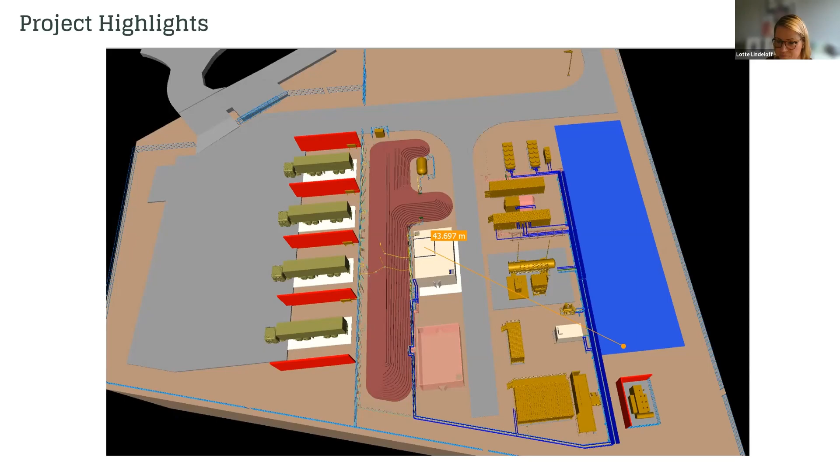You're welcome. Yeah, and we do have some interesting questions from our audience, and we can't wait to hear your answers to these questions. So speaking of the European Commission's REPowerEU plan, how and when do you think the EU will fulfill its import target of 10 million tons of green hydrogen,

Could you repeat? I'm not sure I fully understood your question. I was trying to ask, how and when do you think the EU will fulfill its import target of 10 million tons of green hydrogen according to the REPowerEU plan, and what will be its impact on Australia's hydrogen export?

To be honest, I think it's difficult to say, because when you look at all the projects that have been announced, it seems like it will be fulfilled soon. But also, to be honest, when I think about all the challenges and difficulties we've experienced with our e-methanol plant, which is the largest one and has an electrolyzer of 52 megawatts, I believe it will take a while before you can actually establish plants with even larger electrolyzer volumes. Of course it will happen, but I think it will take a while.

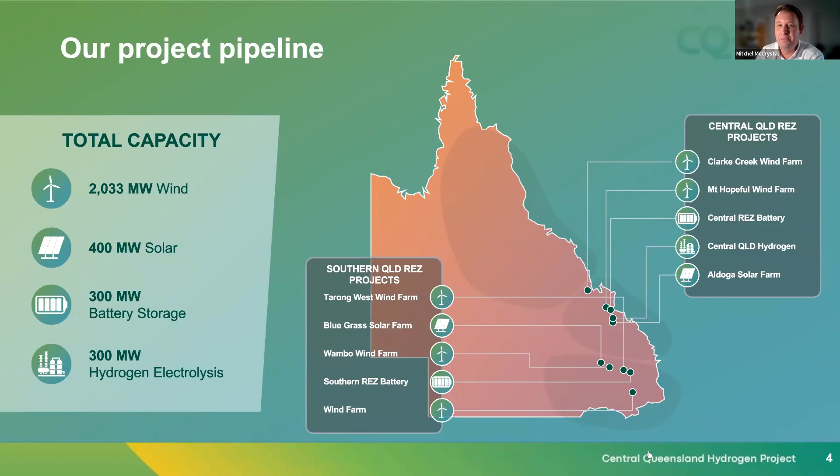To return to the foundations we're calling foundations for success, the first one is the right location. We believe Central Queensland, and in particular the Gladstone region, is an ideal location to start large-scale production and export of green hydrogen. For those on the webinar not Queensland-based, Gladstone is located about 500 kilometres north of Brisbane, the capital of Queensland, by road.

Gladstone is a major industrial mining hub in Queensland. The Port of Gladstone, in particular, is Queensland's largest multi-commodity port and the world's 4th largest coal exporting terminal. It's a major export facility, which aligns with the CQH2 project's export orientation. Another important point about having a project in central Queensland is the proximity to Asia. The Gladstone region and the Port of Gladstone has a long history of providing reliable energy resources to the Asian region, which is where we intend to export green hydrogen.

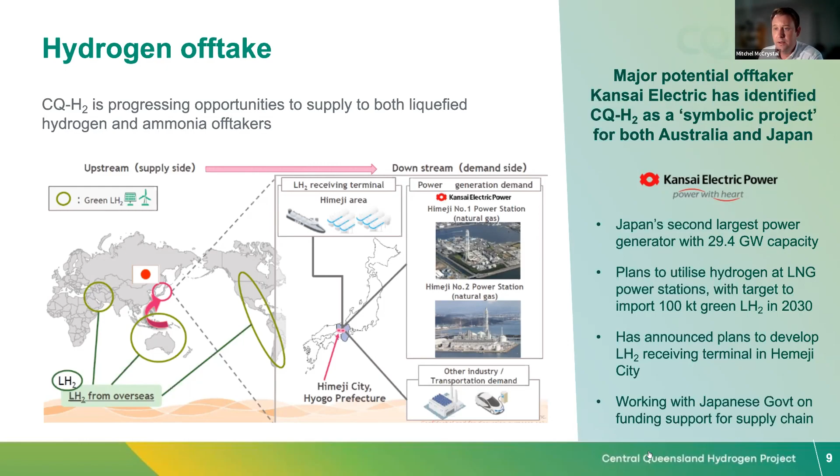As capital costs come down, we expect that renewable energy will become even more like 70 to 80% of the cost. And I think that was something that Lotte was referring to in her presentation as well. And that's really why renewables is so important, why it is a foundation for us. It's a big cost driver of the project.

And as I mentioned before, Stanwell is transforming its business to renewables, and a strong advantage that Stanwell brings to the consortium is its ability to procure renewable energy that's required to produce green hydrogen.

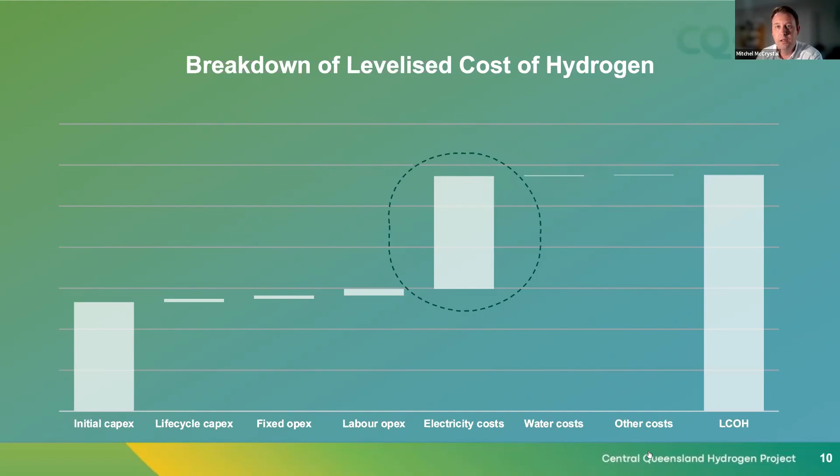I think the absolutely critical element of our modelling is that we can provide 100% renewable energy to supply green hydrogen to our customers, which is obviously a very important aspect of a green hydrogen project.

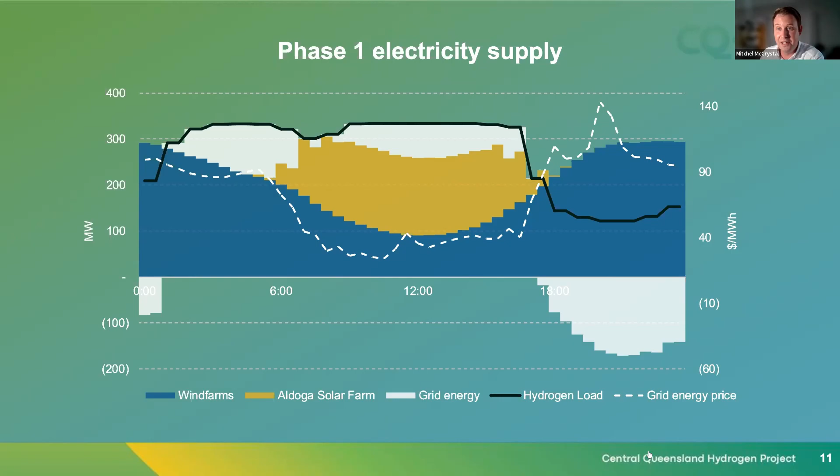What are the benefits? Development of a large-scale green hydrogen industry will drive renewable energy development and manufacturing investment. It'll attract high-quality jobs and investment. It'll create a new low-carbon industry, reduce emissions, as well as providing access to export opportunities.

So there are many opportunities, and what we want to make sure is that the community benefits from these opportunities. So partnerships are critical to making that happen. We're very mindful that our projects won't be successful or sustainable otherwise.

I think in particular, establishing partnerships with our host communities are also critical. And I think what is probably obvious, but general community surveys are one thing, but actual engagement on a real project is another. And throughout our feasibility study, we engaged a broad range of stakeholders to understand their thoughts on hydrogen development in Queensland, and then also to gain feedback on our proposed projects.

And I think the key concerns expressed by the community in relation to our proposed project included the impact on housing availability and rental prices, safety of hydrogen. And I think what we've understood is that there is, or there can be, a negative association with hydrogen. I think what we've understood is that's mostly the fear of the unknown. And I think the important thing is the established expertise and processes that already exist for handling these types of materials—the key is bringing that over to the hydrogen industry.

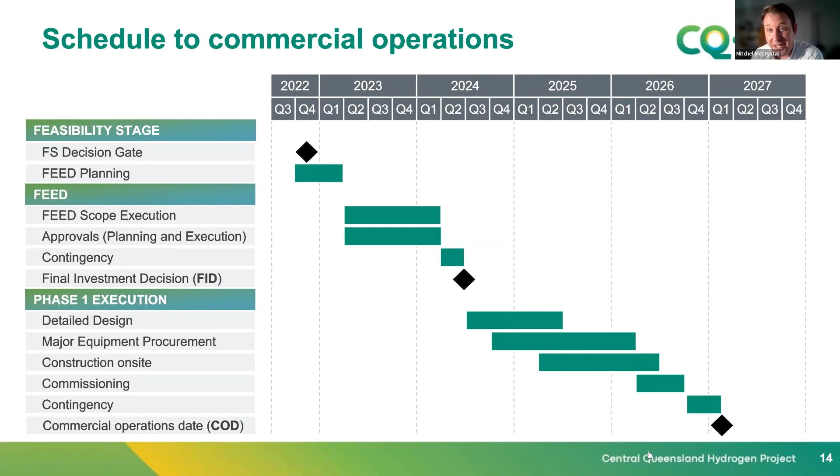That wraps up my presentation today. Happy to take some questions if there are.

All right Mitchel, thank you so much for your presentation. We do have some questions for you. With regards to the upward pressure on electricity cost, it's well reported in both the wholesale electricity prices and the cost of renewables. With the cost of electricity being such an important part of the overall cost of hydrogen, I'm wondering how is the CQH2 project able to mitigate the impact of higher electricity prices?

Yeah, thank you for your question, Holnam. It's a very good question. I think electrolyzer flexibility is absolutely critical to being able to weather the storm that is electricity prices at the moment.

Very recently, we updated our market modelling and financial modelling to understand the upward pressure on grid energy prices, but also the cost of renewables. What we've been able to confirm is that if you have the right level of flexibility with an electrolyzer, you are able to manage the cost of electricity, being able to ramp down when forecast electricity prices are expected to be at their peak.